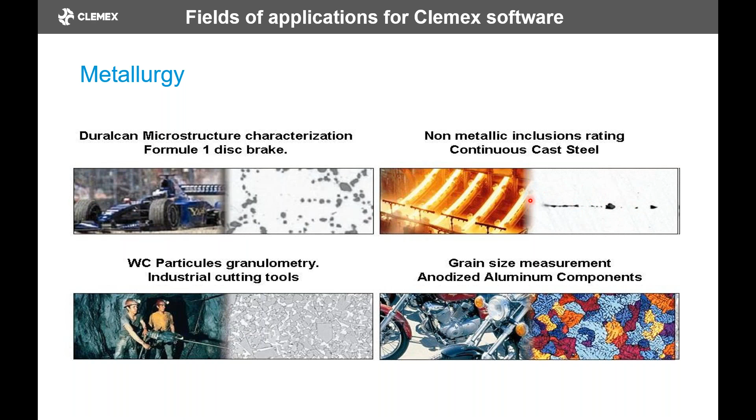But it could also be nodules like graphite into a steel matrix, cast iron matrix. So it's kind of similar. We can do inclusion rating. So again, we have a dark feature into a white background. It's kind of similar.

But we can also address a non-metallurgical application, like this is cotton here or polymers. So basically what we're looking for is something that we can focus on. In this case, the border of these features, for example, would be detected. And then you end up measuring the size of the cotton fiber.

If we look at where we have a cell size measurement, it looks like a grain size. It's still the same principle.

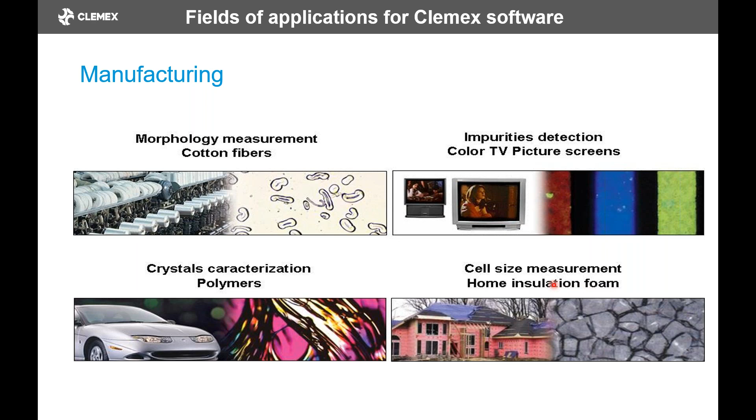We can do some life science also, color imaging. If we look at an artery here, we would be measuring the layer thickness of fat, but we could also compare it to a coating thickness on the jet blade. It's also a coating, right?

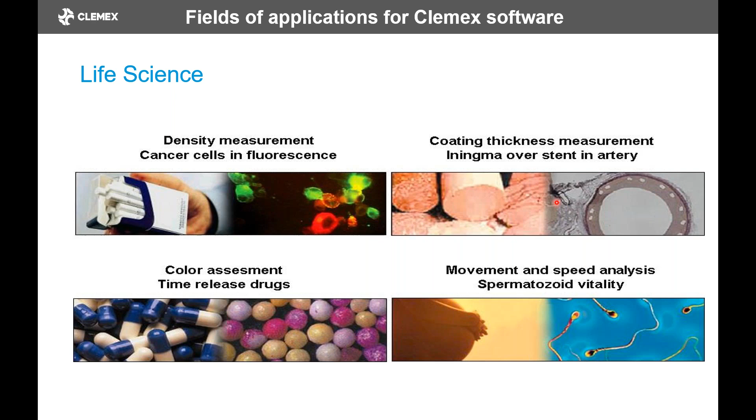So an integrated image analysis system means that we have software that will do the measurements, but also that will control the microscope and a motorized stage, so we can scan a larger area and have better statistics to rely on. So basically, we integrate all of this hardware together: cameras, motorized microscope, stage controller, imaging, all as one piece.

So it's one solution, and we can work with Nikon microscopes, Leica, and retrofit some other existing systems like Olympus.

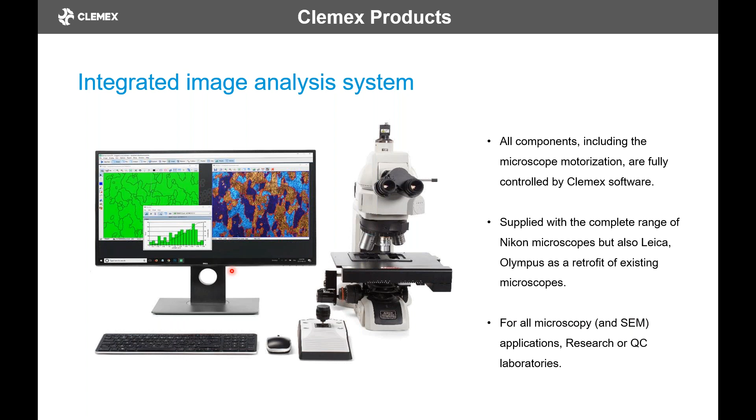We also can import images from SEM. So I remember working on grain size, ceramic grain size, from an SEM system. It works the same way.

Why do we measure grain size? Grain size has an effect on most mechanical properties, for everything that is working at room temperature, generally used in industry. So tensile strength, hardness, fatigue, yield strength, all of these will increase by decreasing the grain size. So the smaller the grain, the tougher it is.

Another example is machinability. If you have coarse grains, it will be easier to machine. But if you want a good finish, it will be better with a fine grain size.

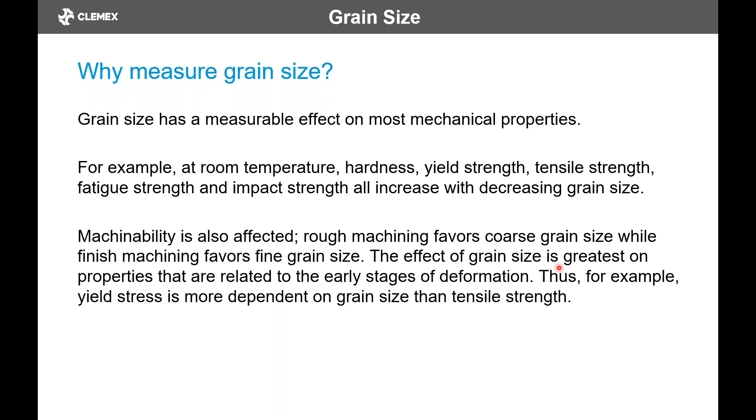Now, to measure grain size, there are various methods, but overall, the idea is just that we're measuring what we see here because it's purely on a geometric basis. That means we could measure other things than grain size with a grain size method, like the one we'll be talking about. You will see some examples afterward.

So what we're saying is that we can estimate the average grain size, crystal or cell size of non-metallic materials, the same way as we would do for grain size.

Generally the approach is to use a comparison method, using charts, but we can use the more accurate intercept and planimetric methods. Charts cannot be used with the measurement of individual grains, which is sometimes what we're looking for.

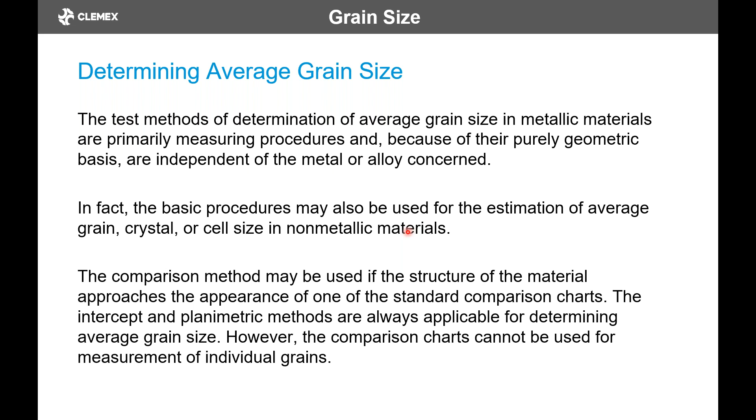Before we get into the measurement, we should have a quick look at sample preparation, because it's quite important. If we don't want to distort the grains, we need to make sure the material is not deformed. So when we cut the original sample, we need a proper cutoff wheel to avoid excessive deformation.

The mounting is important, but not necessarily required - sometimes you could work with an unmounted sample and still get some grain size. Grinding and polishing is the next step. What's important here is that we end up with a good sample preparation, not just for a nice final finish, but also to remove any residual deformation by having organized steps for material removal.

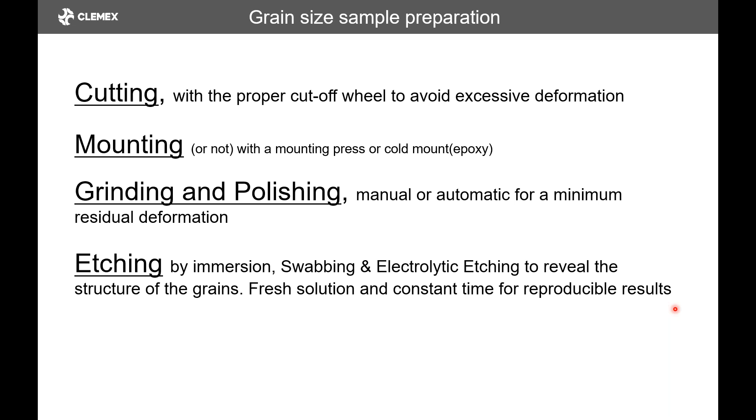Etching will reveal the grains, so there are various ways of doing this: immersion, swabbing, electrolytic etching, and others. But to make sure we're repeatable, what's important is that a fresh solution should be used and a constant time for reproducible results. If your etchant has been there for 2 weeks and you leave your sample in it for a longer time, you might end up with a burned sample, making it very difficult to get reproducible results. If you make it a habit to change your solution every other day and keep your etching time consistent, you should have consistent results.

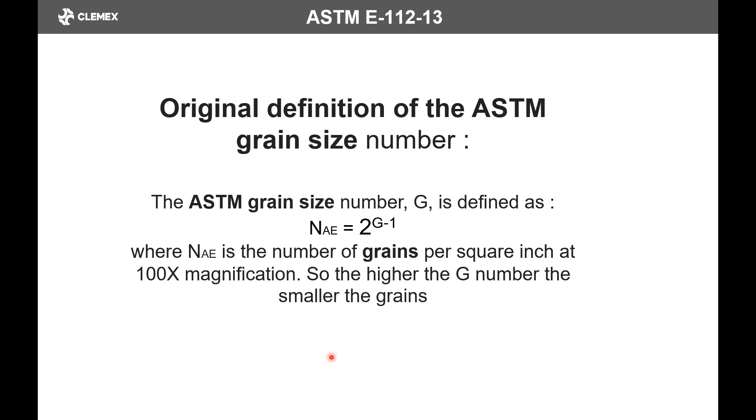What's important to remember as a rule of thumb is that the higher the G number, or grain size number, the smaller the grains. That means there are more grains that fit within the square inch. So that's the idea of the grain number getting higher, similar to buckshot, I guess - it's the same principle. When you have more pellets into a certain area, the value increases. So that's more grains.

So there are 3 major methods. The comparison method is pretty straightforward, I'm sure everybody's familiar with it. Basically you look at a comparative reference - like in this case, you would look in the eyepieces and see the individual grain size, then look at the live image underneath, and say it's 4, 5, or 5.5, whatever. But there are also other methods, or we can use charts rather than just the eyepieces.

The planimetric procedure means we're counting the number of grains within a known area, which is why we have a circle, and we'll go over that later on. Then the intercept procedure, which is probably the most accurate one, is where we count the intercepts touching a line. There are various approaches to that.

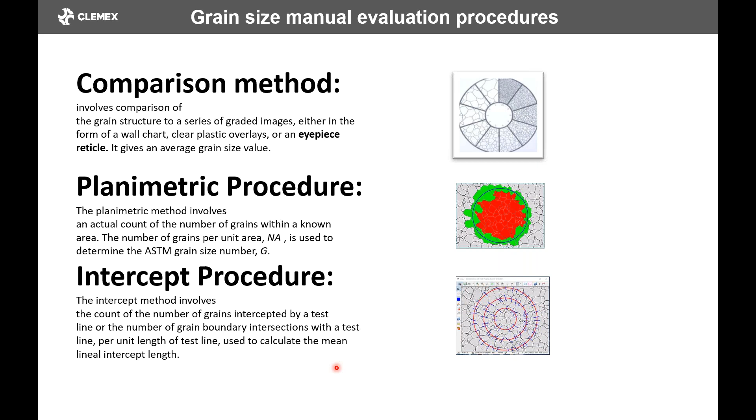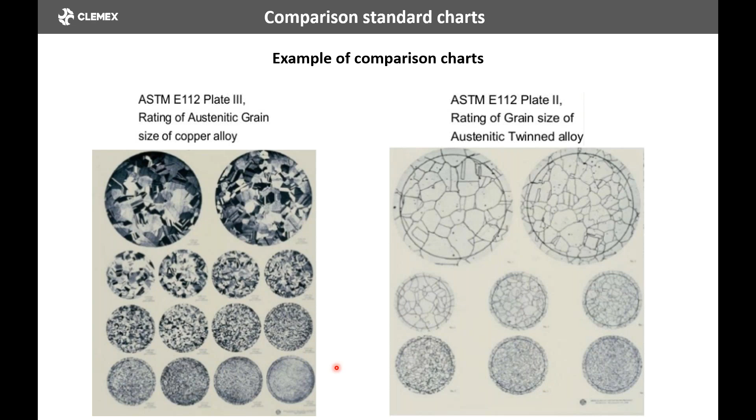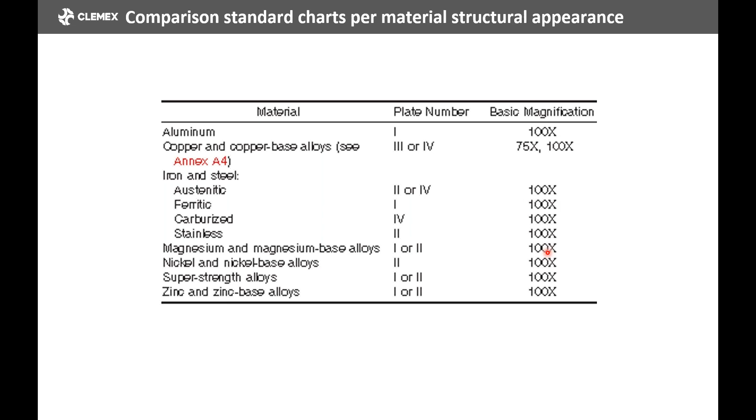Now, if we look at the comparison chart, we can see there are various types of charts for various structures. Of course, you need to choose a structure that is representative of your material. So if you have twin grains, you have to use plate 2. If you have an example of copper alloy, you would use plate 3. If we look at what the standard says, there's a variety of plate numbers - 1, 3, 4 - depending on the material. Nickel alloy base will be 2, and normally the reference is based on 100x magnification. So if you're looking at a chart, you have to look at 100x to have a comparative magnification.

Now, we can use automatic image analysis, and that's the purpose of this presentation. All of these test methods can be applied using an image analysis system. It could be used for any type of grain size, but also, with the benefit of using an imaging system, you can work with non-equiaxed types of grains as well.

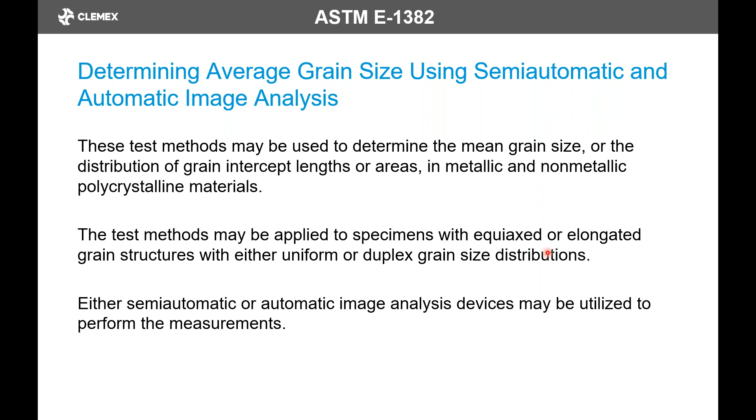So Jeffries' planimetric method is a fairly simple method in the sense that you make a circle of a certain size, which is 79.8 millimeters. But actually, with an image analysis system, you can overcome this size restriction - we'll come back to that.

So basically what we're doing is looking for the number of grains in an area in square millimeters. What we see in red are the complete grains, and what we see in green are the grains that are intercepted by the lines. They're basically put into the formula: N1 is the red, N2 is the green divided by 2 because they're half a point, and we have the Jeffries multiplier that takes into account the magnification.

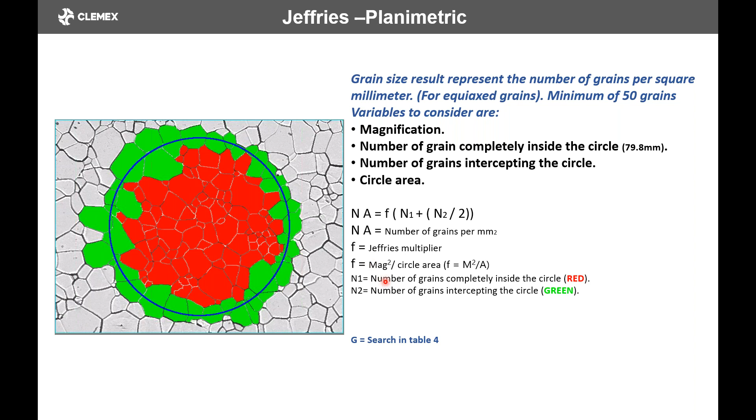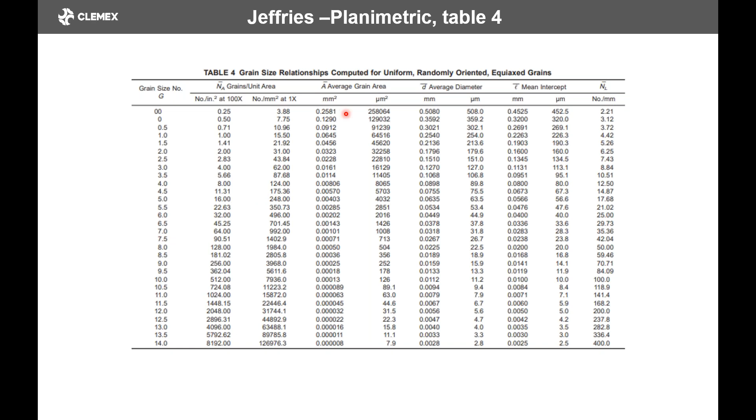You could put that into a formula with the log formula, but you could also just look into the ASTM chart, table 4, where if you end up with the number of grains at 90.51, that means you have grain size 7.5. So it's a pretty straightforward method that you could use. And there are other factors you can look into as well.

The Heyn lineal intercept method for single phase grain structure.

It's important to mention single phase grains because normally if you make a straight line, you need to make sure that you have a single phase, so you don't end up with 2 or 3 different phases, which would need various orientations of the line to make sure you have something more random.

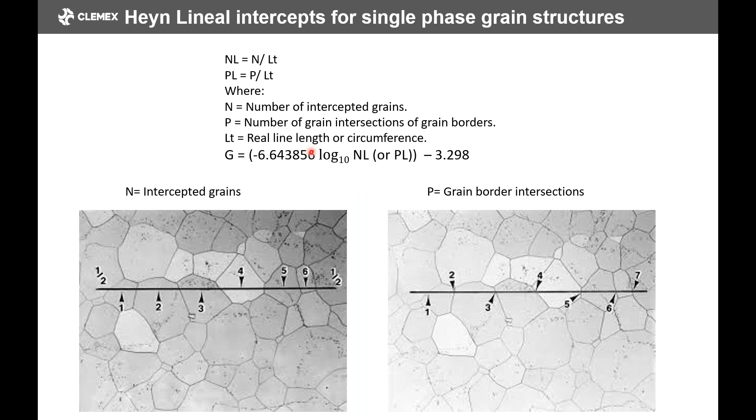And then you make the measurements, or you could use the grain border intersections, which are the segments of the lines. Instead of having counts, you have segments, and you end up with an average segment length, which you put into the formula here, and then you will have the grain size measurement.

One of the methods with the circle is an alternative to the planimetric method that we saw earlier, continuing with the intercept approach. The Hilliard method was originally developed by having a circle of a certain size, and you basically count the intercept.

Before it was done on a ground glass or a monitor, but now you can do that directly on the screen where you would count the intercept, and at the end you would measure the segment. The segment and the number of intercepts give you your method.

Abrams improved that method by adding 2 other circles. The idea is to have within a certain image more counts, because there's a certain number of grains that you should use if you want something repeatable or statistically viable.

Having 3 circles gives you more intercepts to count, and it's not limited like the manual planimetric method, where the grain size could be deformed. It doesn't need to be equiaxed because now we have a random method of counting the intercepts.

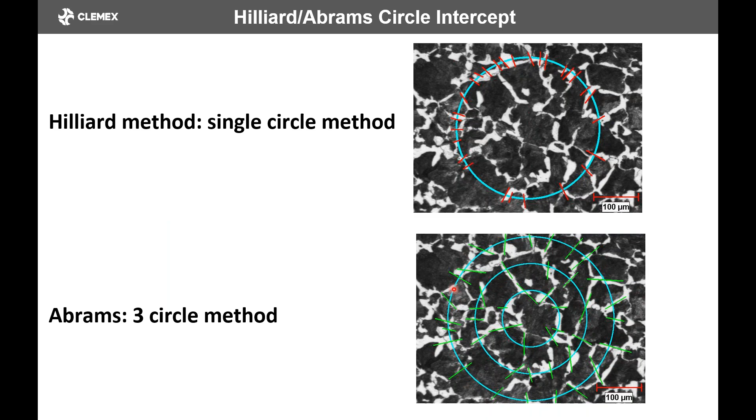So we're getting into the Clemex Vision PE. If we look at the first method we talked about, we have a grain size number, like in this chart here. We have a grain size that we look at from a live image, and we look at the chart, and we can scroll, and the grain size value will change.

So it's 8.5, but if you scroll up, it will go 9, 9.5. It normally goes to 10, and if you scroll down, you will see the actual grains that are coarser.

So we can see here that we have a grain size and an automatic measurement just to compare. We have 8.7, and the chart seems to be pretty good at 8.5. Normally the idea is to have a chart if you don't have a reference to do it automatically.

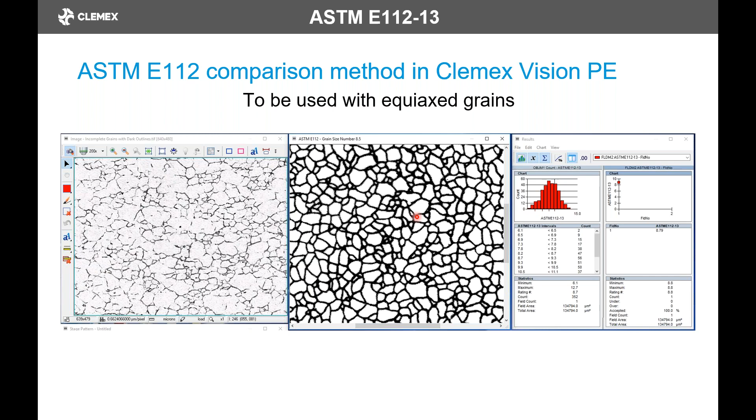Here's the intercept method that you could do from image analysis. If you have a structure that is very poorly defined, where you don't see the boundaries well, like with twin grains, you could use circles like this and just count the intercept, same principle as we just saw, but the measurement will be done by image analysis.

So everything will be counted, and once you're done, you have a number. Another benefit is that you can work at different magnifications. As you can see here, we have a 200x grain, so that means we're not limited by magnification in our calculation.

On the right, we can see a similar approach, but here, because the grains are defined, you can detect the grain boundaries and still do an intercept.

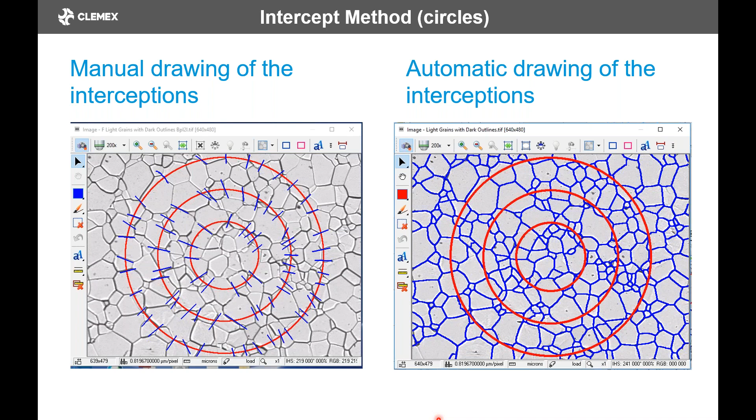The idea here is that we originally use the mouse, but the software will detect the points at which there's an intercept and count them. So if someone says we need to do an intercept method for grain size and we need the circle, you can do that automatically if you can detect the grain boundaries.

Here's a different approach to line intercept. This sample was done with the McQuaid-Ehn method. Most of you are probably familiar with that: you heat up the steel at 927 degrees for 8 hours, and put that into a carburizing environment so the carbide will precipitate at the boundaries.

In this case, it was electrolytically sodium hydroxide etched, and it's observed in dark field. Sometimes some material will react to bright field, but like in this case, it's better with dark field.

Now, what we're doing here is just drawing the lines that are representative of our surface. A circle will not be the right approach here, because with a circle you won't have any grains, and you'll end up with very long segments, which will throw off your values.

This here, you can cover the number of lines, and we have about 4,000 microns of lines, and then we count the intercept, giving us an accurate grain size measurement for a challenging structure.

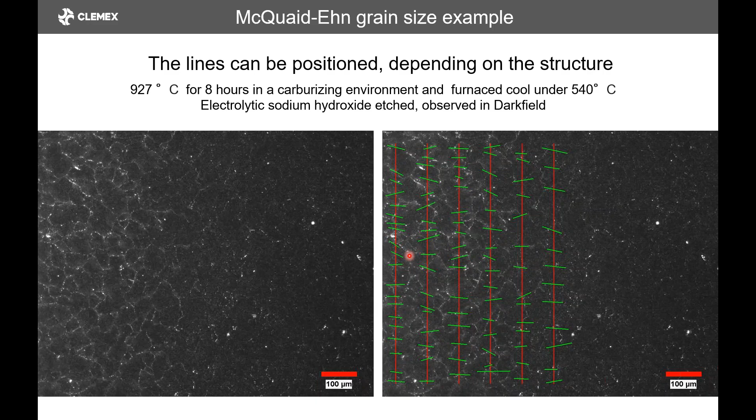Now, what I mentioned earlier is that you can detect the grain boundaries. When you end up with a good detection of the boundaries, the software will measure the grain size.

Here we have two methods of measurement. This one is called object measurement, so all the grains are measured individually. We can see we have grain size classes, 6.1 to 6.5, and so on, and we see the number of grains. So we have a good statistical impression of the grain distribution.

So when you're scanning, you can see your grain size vary. What we also have is the field measurement, which is certainly very interesting, because you end up measuring by intercept method.

You're measuring all the grains, and all the lines that you have will intercept a detected line and count the segment. So it will measure like this, horizontally and vertically, to end up with something that is quite accurate.

And you can see the measurements are similar, 8.7, 8.8. We have similar values, even though it's counted differently.

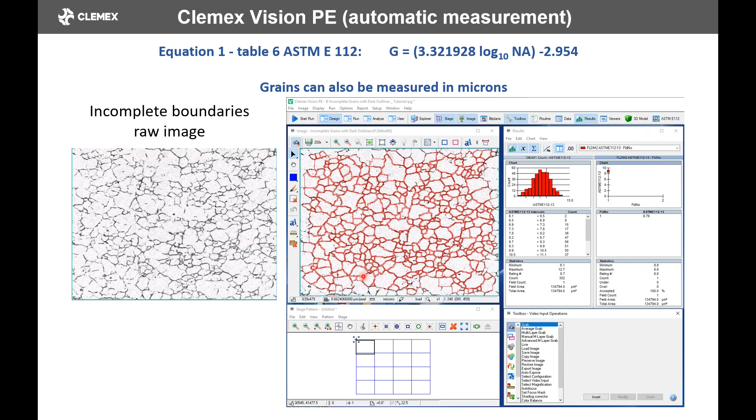Grain size measurement, we can see here what we just talked about: the grain variation by object. So we end up with some statistics that are interesting.

We measured 57,000 grains in about a minute. So it doesn't take long to measure something that is interesting or representative.

At the same time, we measure the grain size by field rather than by object. You can see that each dot represents a field measurement, an average grain size for that field.

So the idea is that when you're scanning, you can see the variation of grain size within your material. Instead of having just the distribution of the grain, this tells you where they are, because you know the field position.

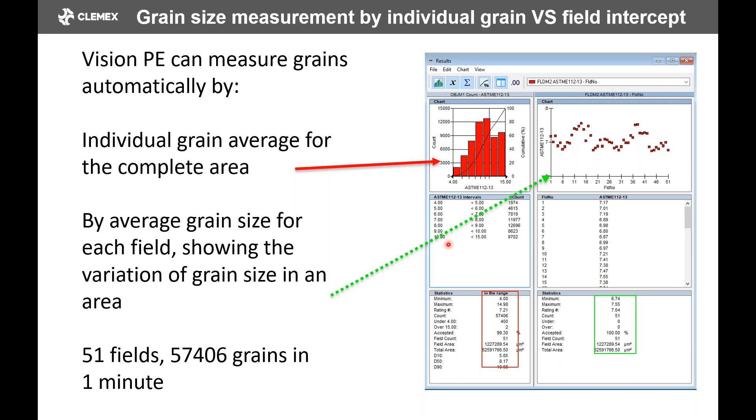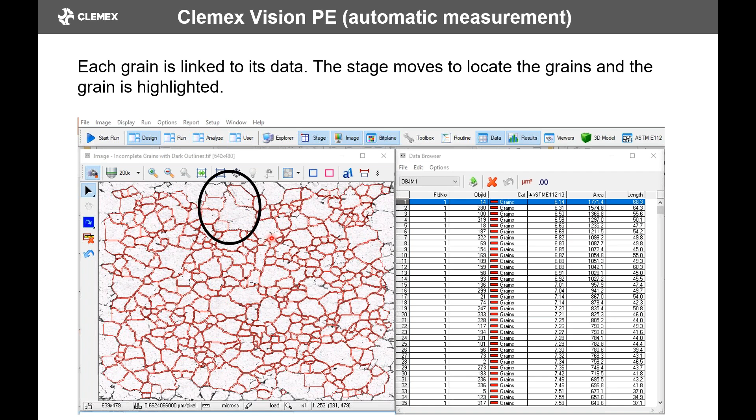One of the benefits you have is that, while having data is important, you don't want to be limited to just a raw number. So it's important to have a browser like this where you can click and see the object, so you can validate that your results are actual grains and not artifacts you've missed for some reason.

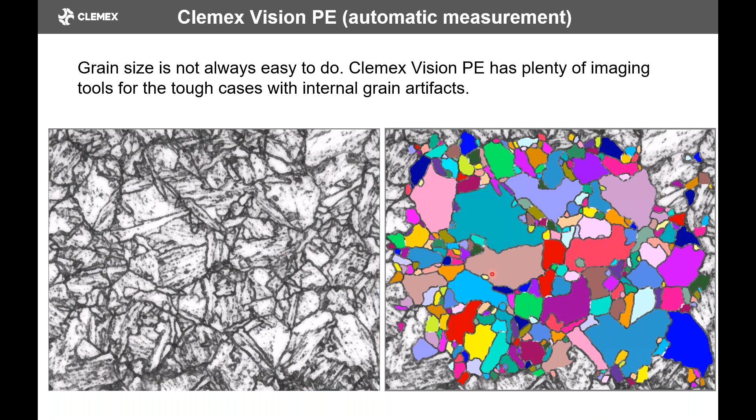Not all grain sizes are easy to do. This is an example where we have a material with a lot of noise inside, and it's very easy for systems without enough instructions to pick this up as false boundaries. As you can see here, we're getting quite good results.

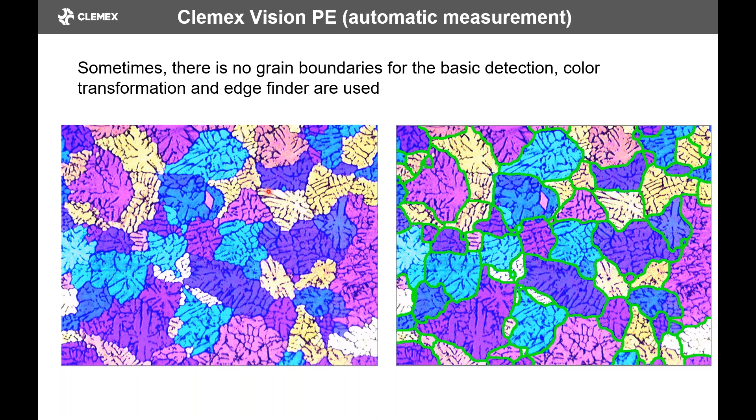Here's a new method of detecting boundaries. This is quite challenging with traditional methods; normally it's actually impossible to detect automatically. We've developed this new approach where we can get the grain size well detected. In this case, these are stainless steel, and they were Vilella's etched.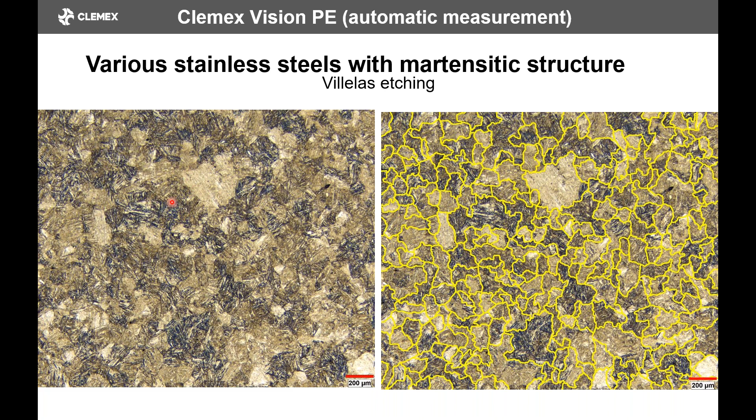Here's another one. It's not too easy as well, right? So we have a lot of no real boundaries. This new algorithm makes a good job with this. Here's another one. Again, traditional threshold, it's not possible to detect that.

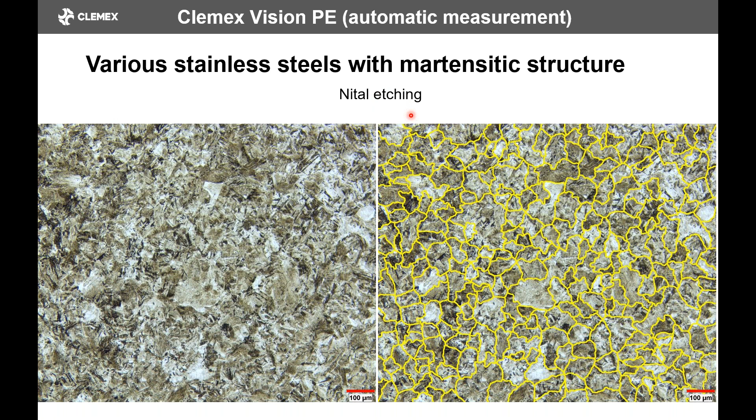Now this one was nital etched. And here's another one where maybe this one is a bit easier in a sense that we have more white and black kind of boundaries, but still it's very difficult to detect with traditional method. Well, this new algorithm makes it quite efficient.

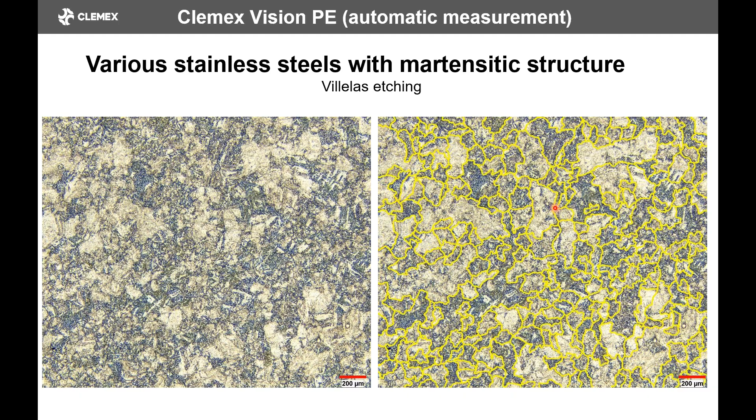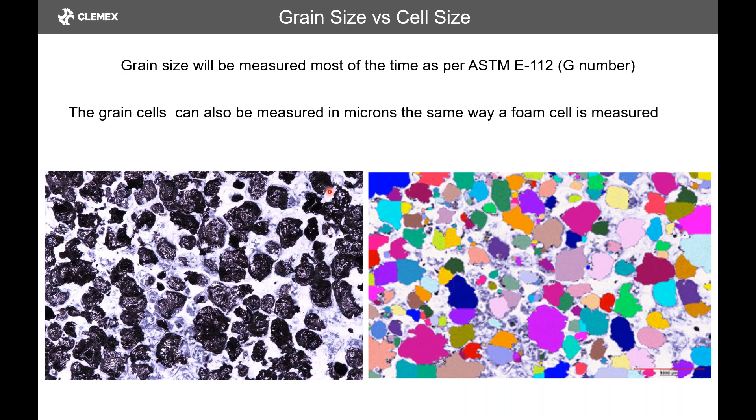Now, this is what we talked about earlier, where we said that it could apply to various types of material. This is a foam brick, so this is like a porous foam, of course. As you can see, we can see the pores, and we can measure grain size. So the formula that we use for the intercept, for example, could be used for this as well to measure these types of material.

The benefit is that everybody does it the same way. You put the micrometer on it, you run your calibration, and it's always done the same way. And there's a NIST certificate that you can have for your audits.

So in conclusion, we're conforming to the standards that are available. We have many methods that we can use to achieve the measurements. We're not limited to easy grain size, we can do some challenging ones. So we have this object and field measurement, so we have a better evaluation of the grain size throughout our material.